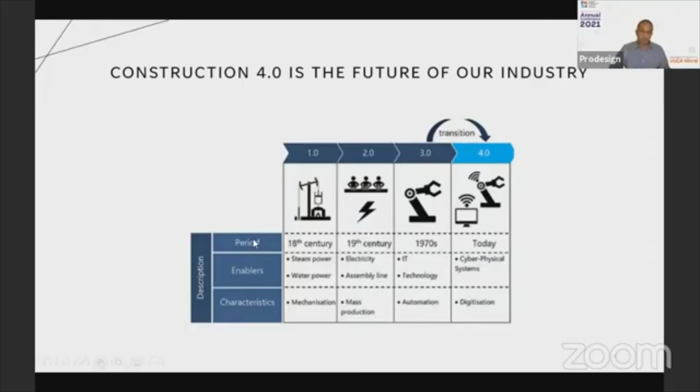So essentially today, I will be talking about BIM, building information modeling, and how this is improving the way projects are being delivered and completed buildings are being managed all around the world. Then I will explain how new visualization techniques like augmented reality is helping contractors build right first time and save cost, time, and improve quality.

I will then follow with what we have new today in this project management world, that is common data environment platforms, and why we should look beyond Dropbox or cloud storage systems for effective project management and communications management. Then I will finish with my own addition to Construction 4.0, which is sustainability.

Indeed, the construction of the future will inherently be green if we want to combat climate change. Clients have understood this better than us, and they are driving the demand for certified green buildings. This will require a specialized skill set in project management. Wherever possible, I will use some local case studies to illustrate how these concepts are changing the way projects are being delivered.

Now, if terms like Internet of Things, connected systems, machine learning, artificial intelligence, building information modeling, virtual reality are not familiar to you, something you're not keen on, then you better get familiarized with them. Like the pandemic has taught us working online, these new tools will also take us by storm. The digitalization of the construction industry is accelerating, and it is not time to be hesitant about this change and adopting new technologies.

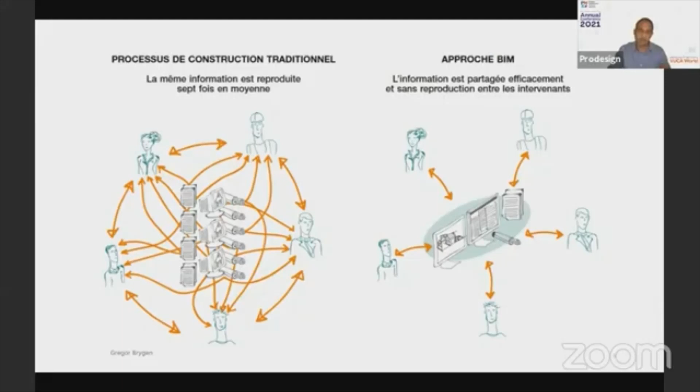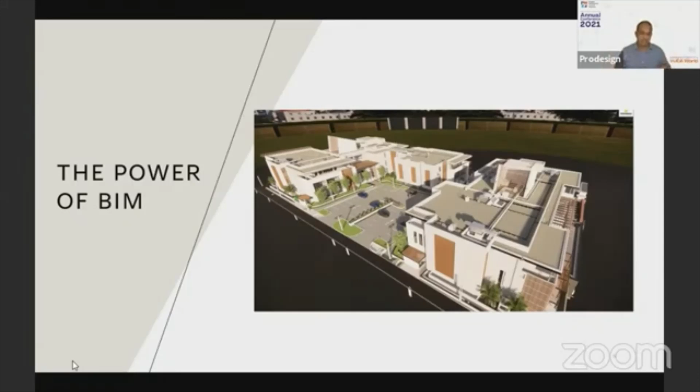To describe in its simplest and quickest way, BIM is about creating a 3D digital model of a building, which is managed from the inception to the handing over of the project. Now, what makes it different, or what is the important difference between a normal 3D model, which we have seen in the past, and a BIM model, is information content.

When you work on 2D, or illustrative 3D models like those produced in 3D Studio Max or SketchUp, information on the building being designed is scattered in many documents. You've got specifications, schedules, reports, drawings, bill of quantities, in a very fragmented manner, whereas on BIM, it can all be hosted on a single model.

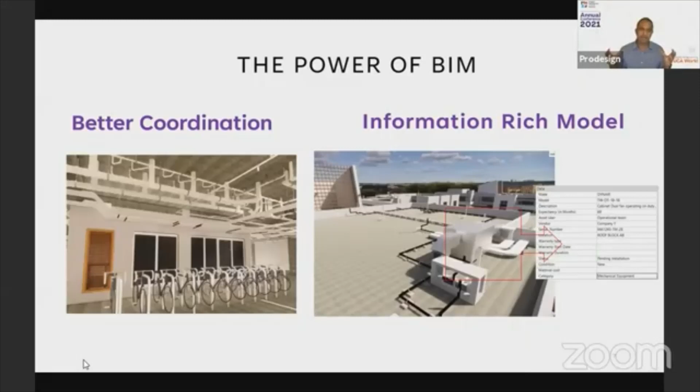Now, what does this really imply? I guess, if I had to answer that from my 16 years working on BIM, it is traceability. It is the ability to transfer key information and decisions made at the inception stage of a project down to the operations and maintenance stage, in a single model, as opposed to dozens of scattered documents.

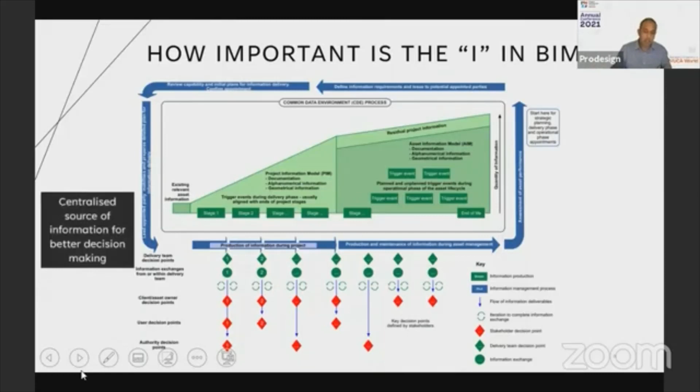Why is it important for project managers to understand and adopt BIM? You must have heard or noted keywords I've been using in defining BIM, like collaboration, coordination, communication, exchange, which are of primary concern to project managers. BIM, by its very nature, is a collaborative working tool. It doesn't work otherwise. By adopting BIM on a project, the team is compelled to collaborate more efficiently.

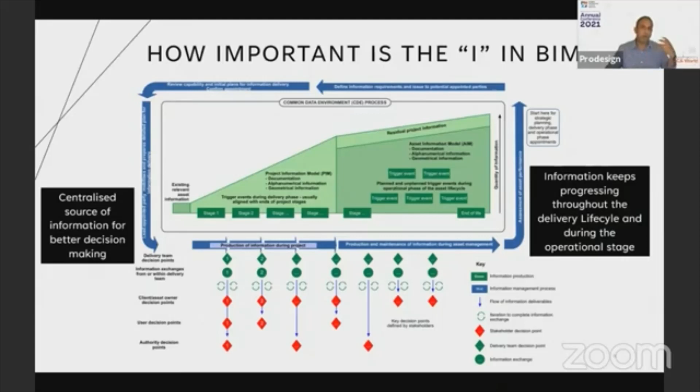Working on BIM allows the team to work on a single 3D federated model, one where all the work of all designers is superimposed.

If I had to describe how BIM will change, or is already changing, the way construction projects are managed, first I would say by having a kind of 3D model which is a superimposition of the work of all the designers, like the architect, the structural engineer, the electrical engineer, the mechanical engineer. Now the project manager is better able to visualize and therefore understand how the various components and systems interact.

Therefore, key decisions are taken early in the project. For example, resolving clashes, optimizing space, and avoiding reworks, which can be costly during construction.

Now, if that BIM model is shared in a cloud platform - I'll come to that in detail later when I talk about CDE - the project manager can track progress virtually in real time. BIM allows us to do that, which was quite impossible in the conventional way of designing things.

The project manager is also able to track the progress of individual teams, and that is potentially interesting when we've got in-house project managers in large property development organizations, especially when working on fast track projects.

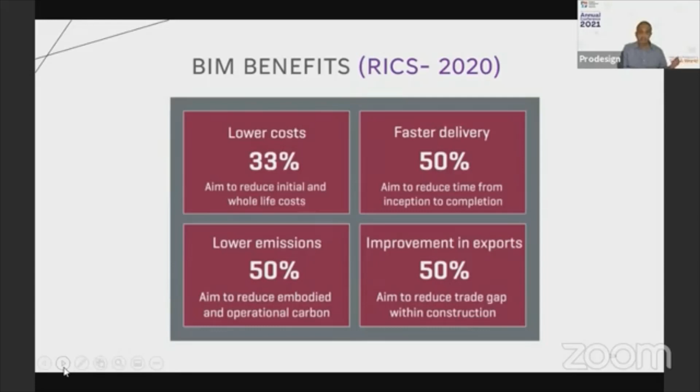There are many benefits that BIM brings to a project, and I guess what RICS has reported recently is very relevant. We are working on a number of projects here locally using BIM, and the cost and time savings are proven.

Now, as I mentioned earlier, BIM, if operated on a cloud platform, has more potential of improving project efficiency. I guess one of the other very interesting possibilities with BIM is the ability to coordinate the works on a common cloud platform, or what we call a common data environment.

In fact, one of the main challenges faced by a project manager is to effectively manage a very fragmented industry, with people working each in their own silos and really not communicating as much as we want.

Researchers have documented that errors have about 50% of their origin in the design stage and 40% in the construction stage. Others have also reported similar waste and inefficiencies induced by inefficient design and construction processes, all resulting from the very fragmented way we operate.

Project managers in construction in Mauritius would probably definitely agree with me that many of the problems we are facing on site have their origin in a poorly coordinated design.

In the construction industry, construction project management processes are still heavily reliant on documents, files, if not paper, rather than data. The document, whether paper or digital, is still the most widely used information source today.

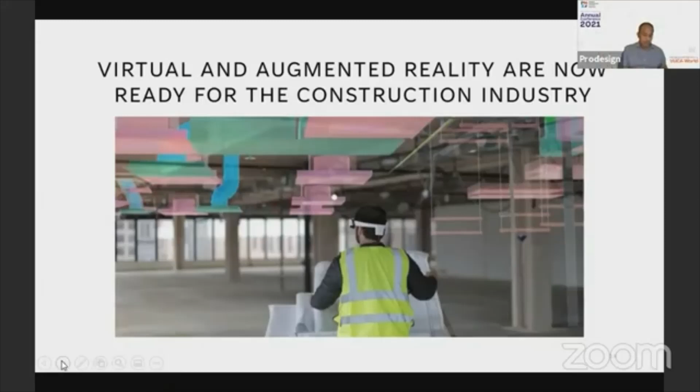Those who follow us might have noted that, after we've got a research and development department, and after quite some extensive R&D, we have been able to connect a BIM model to a fully immersive, real-size, interactive virtual model, where one can walk in and visualize all the details of construction as if we were walking inside the finished building.

Now, one of the other useful applications I see with VR, probably one of the most illustrative applications I can give you, was recently when one of our clients renovating a hotel in Rodrigues had difficulty doing mock-up rooms because of travel restrictions. Project managers would understand the need of doing mock-up rooms to finalize and freeze the design, which is common in hospitality design. The fact that they were not able to travel to Rodrigues to do that mock-up room was potentially delaying the project, which was a concern.

So what we did was we worked out a BIM model and then used virtual reality for the whole team to have a virtual visit inside that guest room. That was done at 4K resolution, so it was as if you were seeing the right finishes, the right color, right patterns. The client was able to finalize that mock-up room virtually rather than traveling to Rodrigues. Just imagine the amount of time and money saved using that tool.

Another problem I see PMs encountering on site is the management of cost and time overrun from waste, rework, snagging, and quality-related problems. This stems largely from the inability of people on site to properly read and understand drawings. I came across an interesting research paper by Dr. Prag and Mr. Sibu from the University of Mauritius, who studied a construction site and concluded that 90% of the workers could not read, let alone understand, the drawings. That's quite alarming. My colleagues, project managers, will concur that this is often the reason for long snagging or rework, resulting in cost and time overrun.

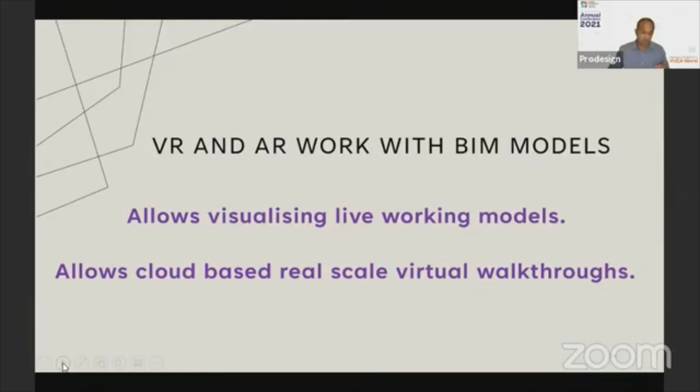But augmented reality can correct that, as people tend to better understand a 3D visual than a 2D drawing. It is now possible to overlay BIM models on site with millimeter accuracy, giving contractors and laymen an overview of what they have to do and how to install it. Progress of work can also be closely monitored by comparing the work with the overlaid BIM model. By simply using a mobile phone, which everybody has on site, or better, an AR headset, site staff can understand what is to be built and how things interact. This can reduce rework, and we are already using that on some of our sites.

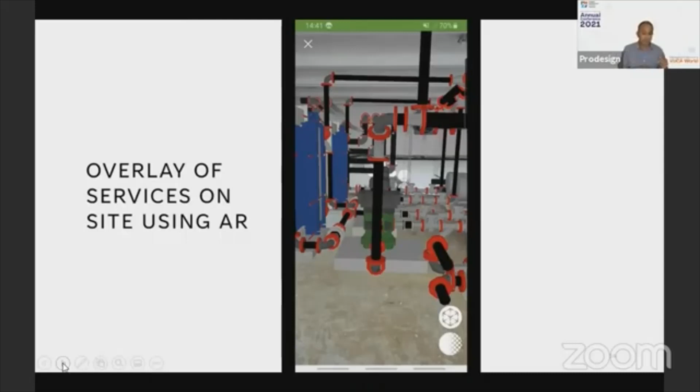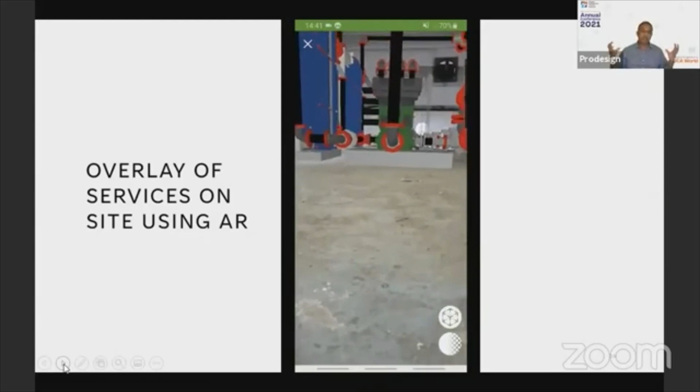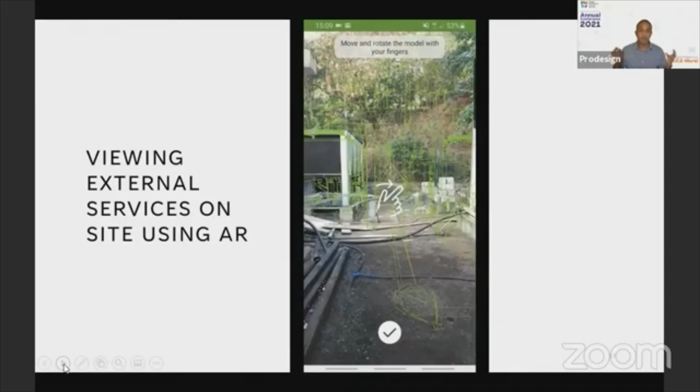What I'm going to show you here is a major hotel renovation project where we used augmented reality to superimpose a very complex and crowded chiller plant room design on the site, which the contractor and his team could visualize using their mobile phones. This helped getting the plant room done right first time without waste and rework. Again, time and cost saved. I guess these are of interest to project managers—time, cost, quality—and imagine the possibilities of having that done for a complete build.

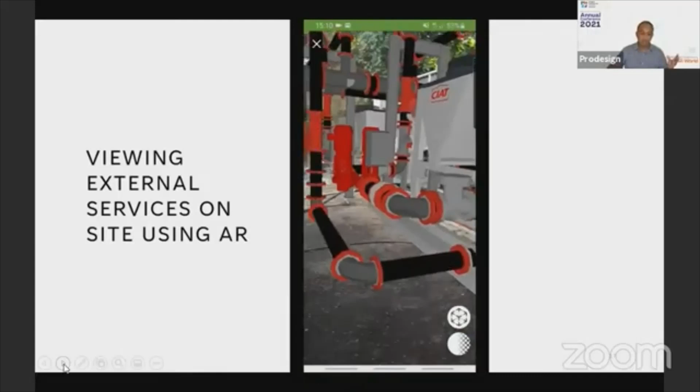I'll probably let that video finish because that's something quite interesting.

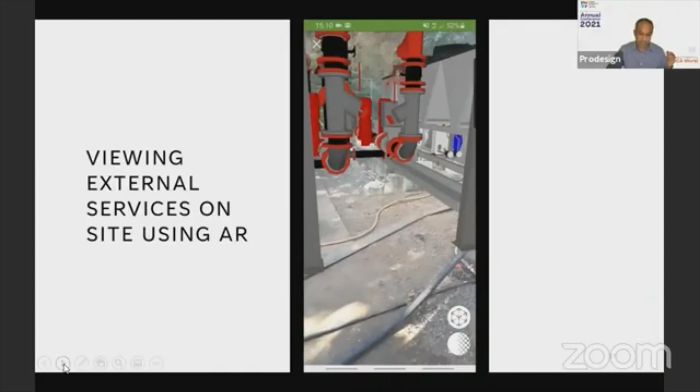All right, last but not the least—I guess I've got time, yes, I think so—as I mentioned earlier, my own addition to construction 4.0. And I emphasize that this is not in the current definition of construction 4.0, but I guess...

Sustainability, more precisely certified green buildings, is the future. I must point out that sustainability and green buildings have been around for more than two decades now, but we are seeing an increase in demand for certified green buildings in Mauritius. From only 3 buildings certified over the last 10 years, we are currently working on 7 new certified green buildings, 1 certified green neighborhood, and we are being solicited for more than a dozen similar schemes.

And this is all being driven by the clients themselves, who are realizing the benefits of such types of buildings and how this is allowing them to combat climate change, which is a matter of concern to them and, of course, to all of us.